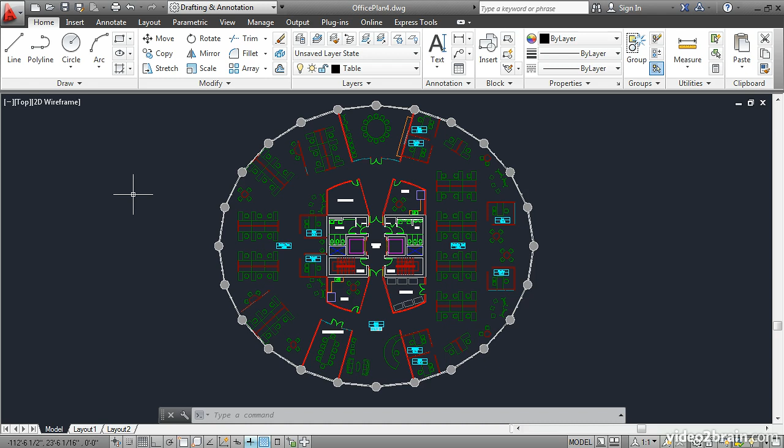Layouts are representations of physical sheets. This layout has a viewport displaying the contents of the Model tab, also known as Model Space. Namely, it's the drawing itself. The layout also contains a title block. You'll be creating a table and placing it in this blank area on the layout.

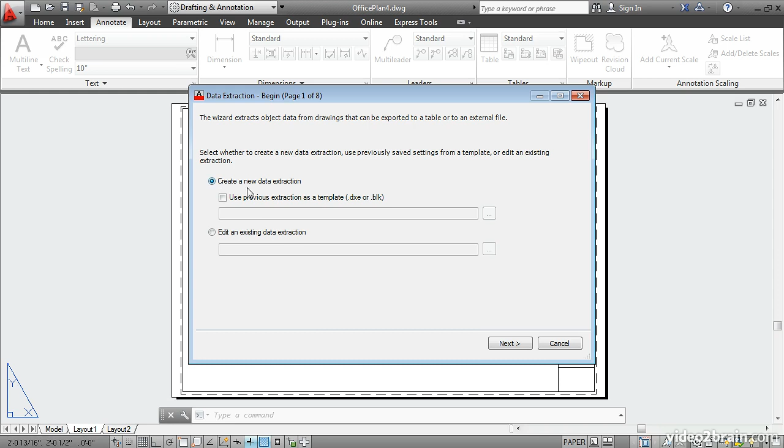Click the Annotate tab on the ribbon, and in the Tables panel, click this tool, Extract Data. This launches a wizard interface which takes you step by step through the process. Let's create a new data extraction and click Next. You're prompted to save a file.

In this case, we're going to be extracting data from the room tags, so let's just use the name room tags as the file name here. It will save it with the extension .dxe. We'll take the default option here to use the drawing itself as the data source. Click Next.

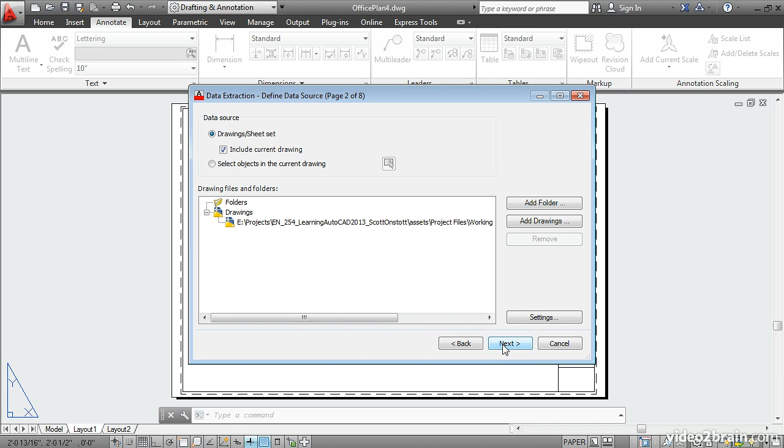You're presented with a list of objects which you could potentially extract data from. Right-click on any one of them and say Uncheck All. Scroll down and select Room Tag. Then click Next.

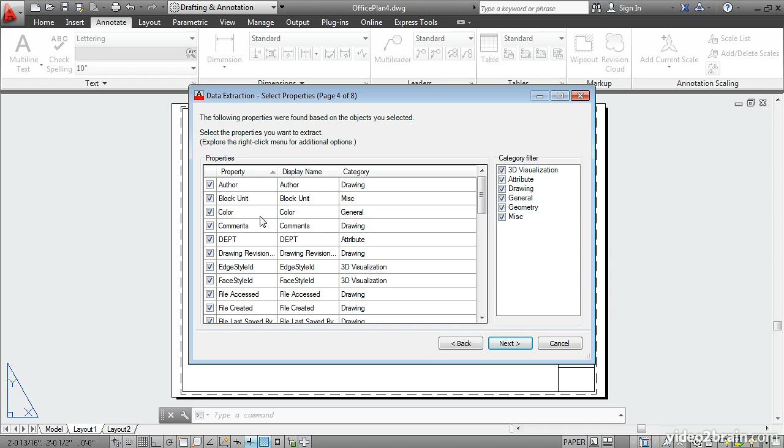Here's a list of all of the properties that could be extracted from the room tag. We're just interested in its attribute values, so deselect all these categories except for attribute. Click Next. This is a preview image of the actual table that will be created. We don't need to have a count and name column, so let's uncheck these here and here.

You can also sort the table by clicking on the headers. Here I can sort the department list in reverse alphabetical order, or I could sort the room number in forward order. Just click the header again to sort in reverse order. I think in this case I will click the department header again to sort in alphabetical order.

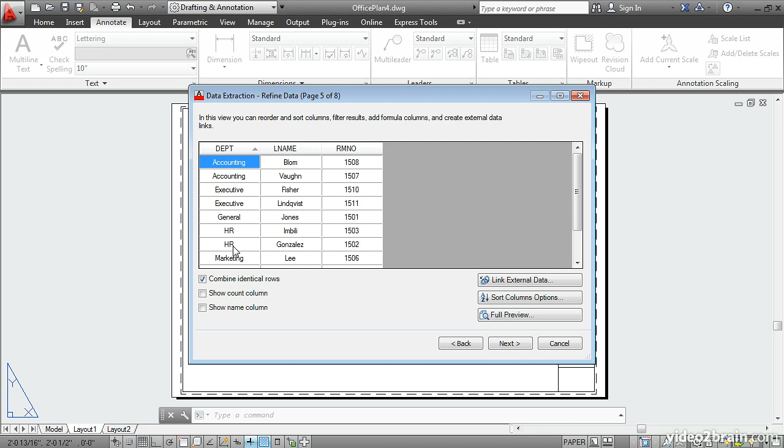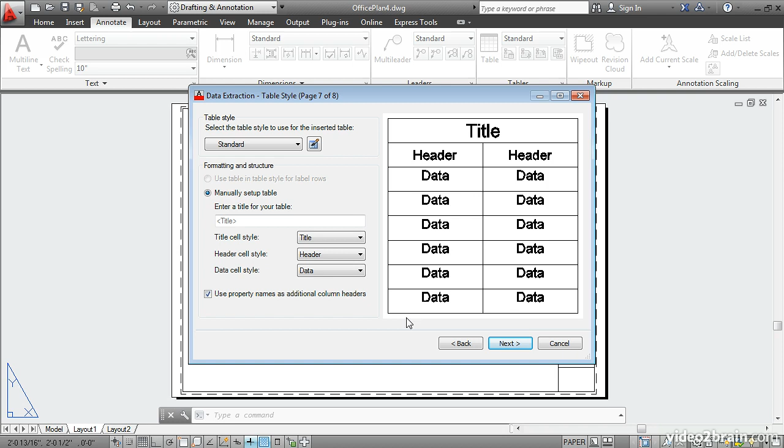Click Next. And then here we need to insert the data extraction table directly into the drawing by selecting this option. Note that you also have an option to output the data to an external file, which could be used in another program. Click Next. And here we'll accept the standard table style, so click Next. And finally click Finish.

There's a representation of the size of the table here attached to the cursor, and the last thing we need to do is just click a point to insert that table. Zoom in, and you'll see the table is populated with attribute values that came from the drawing. It even includes the invisible attributes, which list the department.

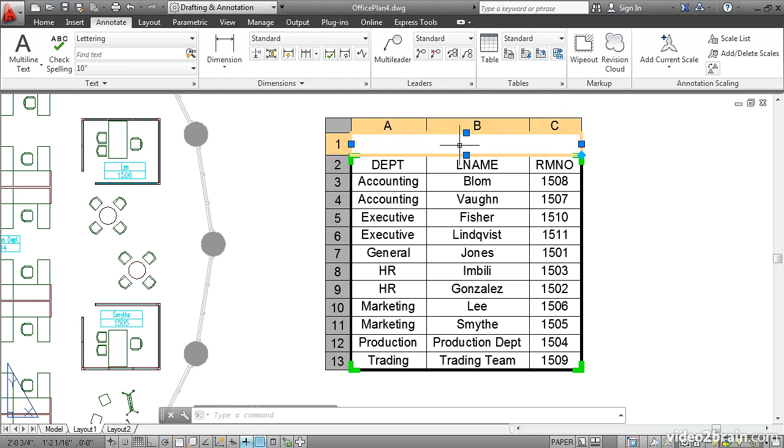We need to edit the table and add some text for a title, and we'll also change these header names, which right now are displaying the attribute tag names. Double-click in this cell and type Room Schedule. Press Enter, and then double-click on the Department cell.

Notice there's a lock symbol next to the cursor. We need to unlock these cells before we can edit them. Hold down the Shift key and click on this cell so that you select all three header cells. Right-click and choose Locking, Unlocked.

Then double-click on Department, highlight that text by dragging over it, and type the full word, Department, and press Enter. Double-click on L Name, highlight that, and change that to Employee. Finally, over here, highlight this text and call it Room.

You can also change the alignment of the cells. Click inside a cell, and then click on its header, in this case B, to select all of the cells in that column. Hold down Shift and click the A column as well. Then up here on the Cell Styles panel, open the Alignment flyout and select Middle Left. Click outside the table to finish editing it.

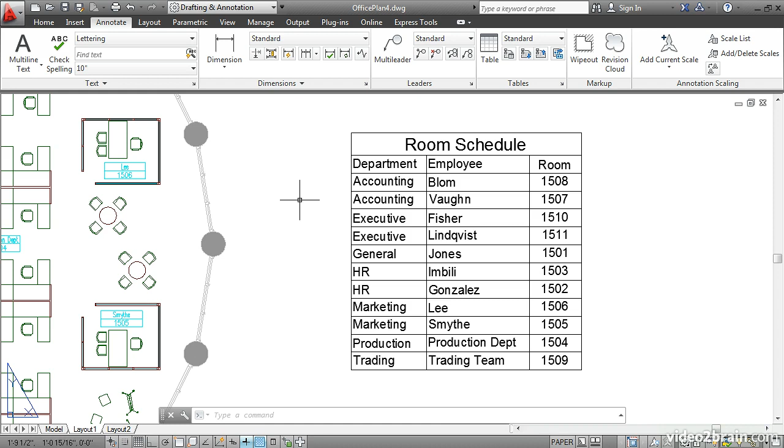So you've learned how to extract attribute data and how to automatically create a table displaying this information. You also learned how to edit table cells and change their alignment.